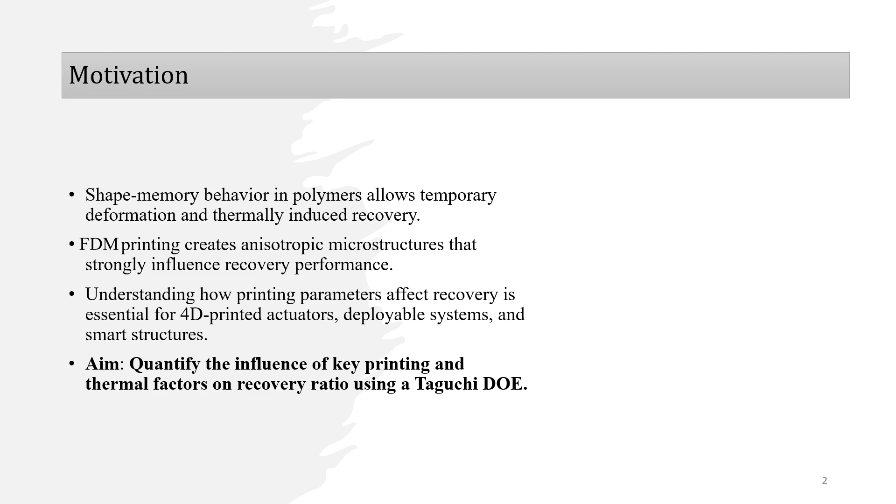Understanding these parameters is essential if we want to move from simple prototypes to reliable 4D printed actuators, deployable systems, and smart structures. Our primary aim was to quantify these effects using a robust Taguchi design of experiments.

And finally, for recovery, we place the sample in a water bath heated to the recovery temperature, TR, and without any external load, the internal stresses release freely and the material attempts to return to its original flat shape.

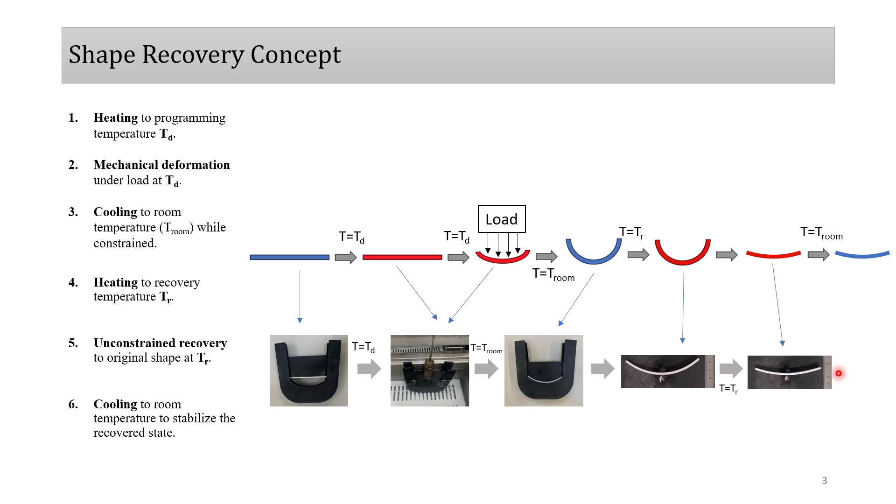Because there are so many variables in 3D printing, testing every combination would take forever. Instead, we used a Taguchi design of experiments. This allowed us to investigate six different control parameters simultaneously. The printing speed ranging from 50 to 150 millimeters per second, layer height from 0.1 to 0.3 millimeters, layer width, nozzle and bed temperatures, and finally, for the last column, we have the deformation or recovery temperature.

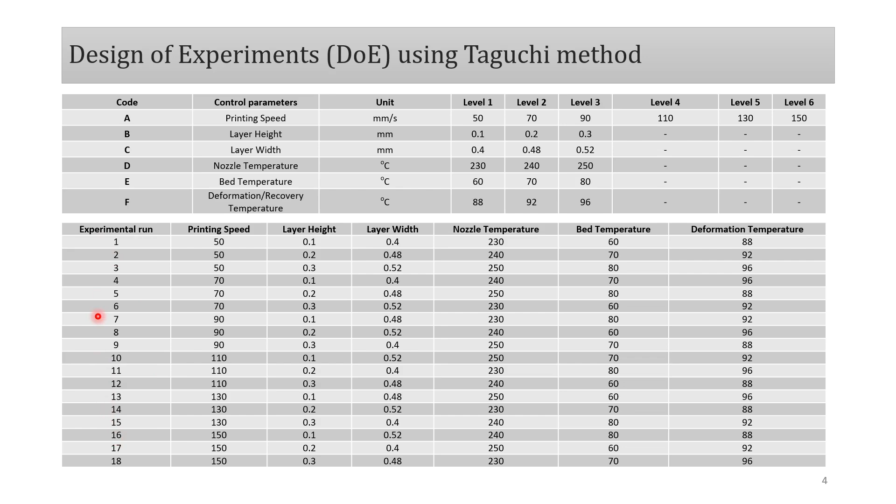It is important to note that for this study, we coupled these two values. This means that for each experimental run, the temperature used to deform the beam was identical to the temperature used to recover its shape. That is, both the temperatures were at 88, 92, or 96 degrees Celsius. The table on the bottom shows the 18 specific experimental runs we conducted to cover this design space efficiently.

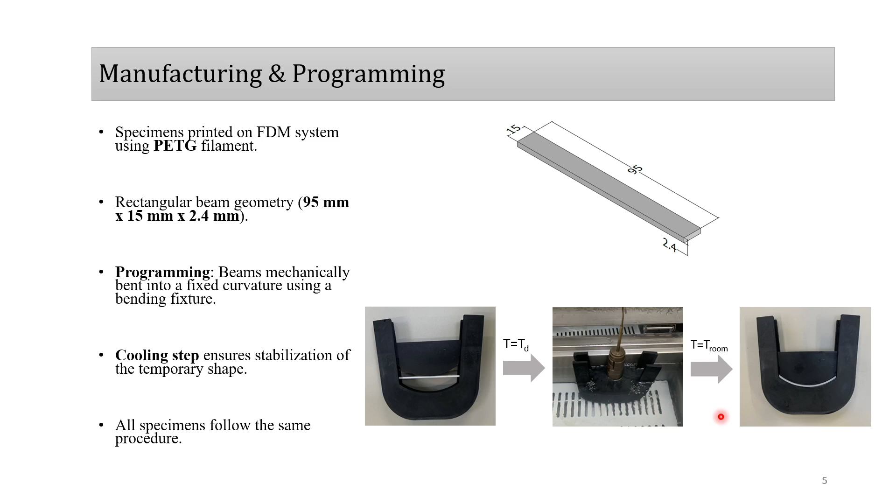For the specimens, we printed rectangular beams with a length of 95 millimeters, width of 15 millimeters, and height of 2.4 millimeters using PETG filament. All specimens were printed flat and then mechanically programmed using the custom bending fixture you see in these images. Crucially, every specimen underwent the exact same cooling and stabilization procedure, to ensure that any difference in the recovery was due to the printing parameters, not the testing method.

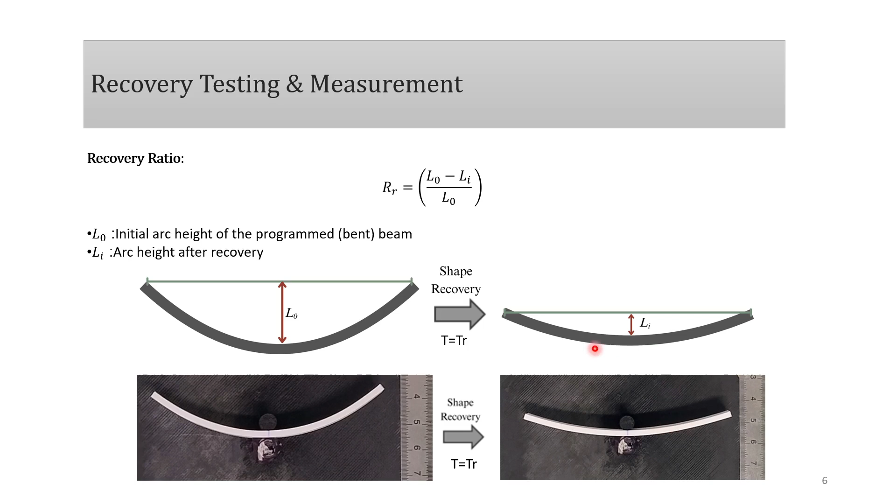To quantify the results, we define the recovery ratio. We measured the arc height of the beam before and after the recovery, and essentially, a recovery ratio of 1 would mean perfect recovery to a flat line. Our goal was to maximize this ratio.

We observed for printing speed a sharp peak at 70 millimeters per second. As speed increased beyond this to 130 and 150 millimeters per second, the performance dropped significantly. This suggests that very high speeds may introduce defects or poor bonding that hinders recovery. For layer height, there is a clear sweet spot at 0.2 millimeters. Thinner and thicker layers both performed worse.

Interestingly, the lower nozzle temperature of 230 degrees Celsius and a bed temperature of 70 degrees Celsius and the deformation and recovery temperature of 92 degrees Celsius yielded the best stability. One final observation, layer width shows a relatively flat response compared, for example, to printing speed, and this indicates that layer width is less critical, giving us more flexibility in design without sacrificing shape memory performance.

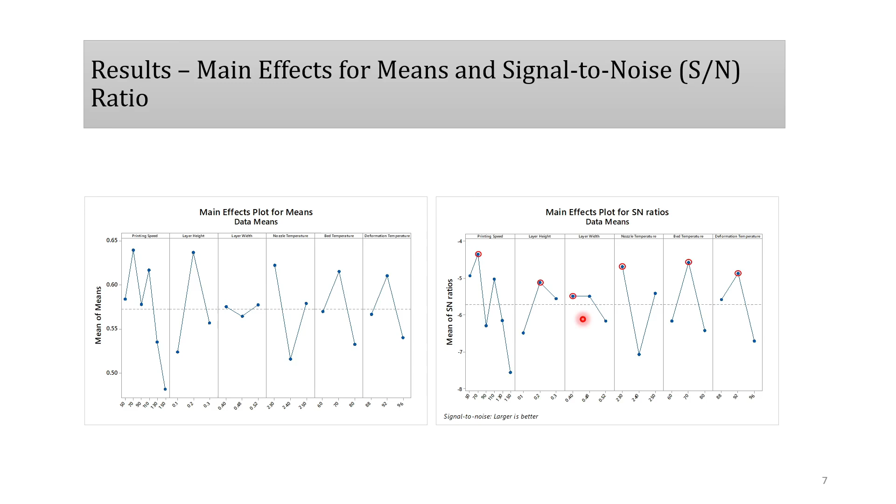In conclusion, this study demonstrated that the manufacturing strategy plays a massive role in 4D printing performance. The Taguchi design successfully identified the dominant parameters. By using the optimal combination, which involves a printing speed of 70 millimeters per second, a layer height of 0.2 millimeters, and a nozzle temperature of 230 degrees Celsius, we can achieve significantly higher and more consistent shape recovery.

Finally, the study highlighted that this process is complex. The strong parameter interactions mean that you cannot just tune one variable in isolation. The thermal history defined by the combination of speed and temperature is key.

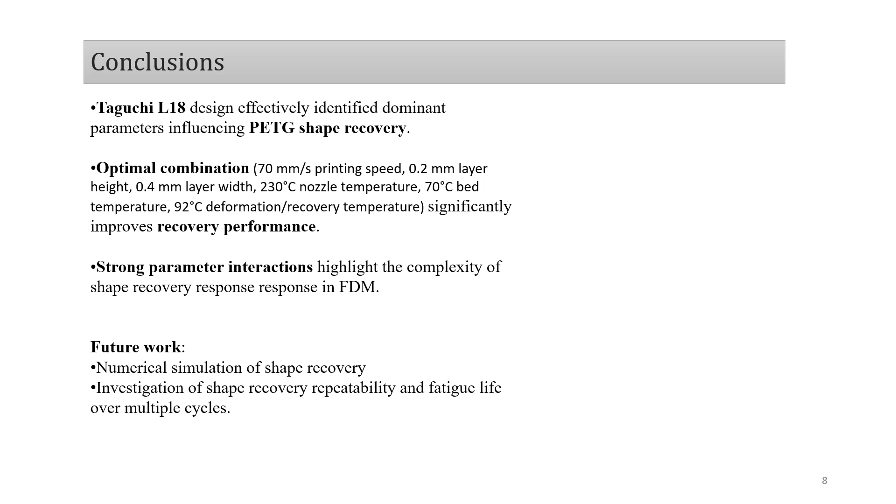For future work, we plan to investigate the fatigue life of these programmed structures to see how consistent the recovery remains over multiple actuation cycles and to develop a numerical simulation for the shape recovery behavior. Thank you for your attention.